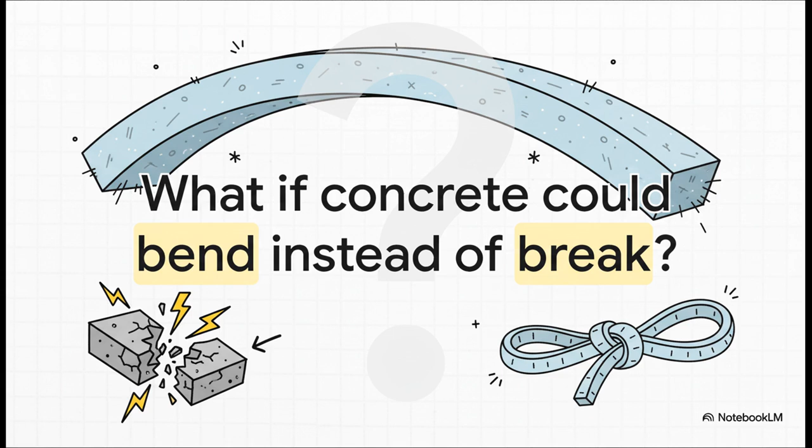I mean, this is the fundamental question. For as long as we've been building with concrete, its Achilles heel has always been its brittleness. Under tension, it cracks, and that crack leads to catastrophic failure. ECC is a material that was designed, right from the micro scale, to solve that exact problem.

And here it is, the punchline, right at the start. Just look at these numbers. This is the tensile strain capacity, basically how much it can stretch before it snaps. Normal concrete gives up at about 0.01% strain. ECC, it can get past 2%.

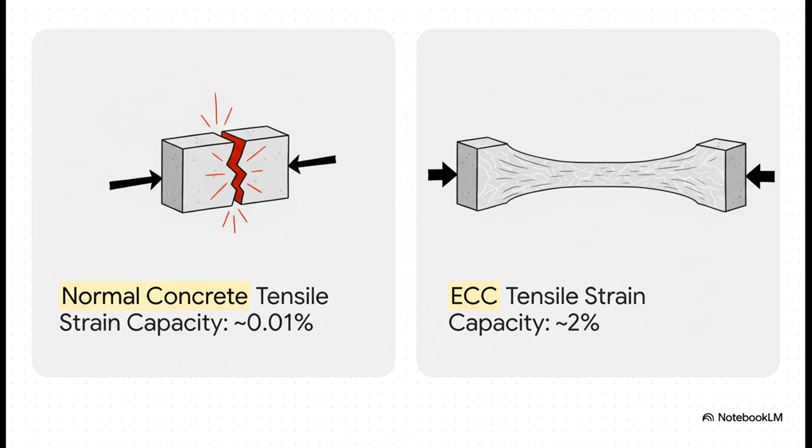And I want to be really clear here, that is not a 10 or 20% improvement. We are talking about a more than 200-fold increase in ductility. This isn't just a better concrete, it's a completely different kind of material.

So what is ECC officially? Well, it's a composite that's been specifically engineered to act more like a ductile metal when you pull on it. And the key term you're going to hear a lot is pseudo-strain hardening. All that means is that, unlike regular concrete, which fails the second it gets its first real crack, ECC actually keeps getting stronger while forming this whole network of tiny, tiny micro cracks.

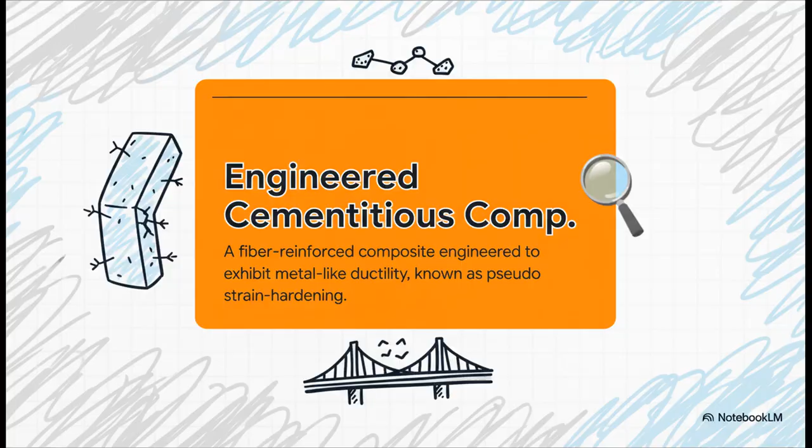Okay, so to really wrap our heads around what makes ECC so special, we have to look at how it behaves under the one condition that is concrete's mortal enemy: direct tension. This is where all the magic, or, the carefully engineered science, really happens.

Now, for any of you who actually work in a materials lab, this is a super important point. The standard tests we use for concrete, like the splitting cylinder or four-point bending, they're all designed for brittle materials. If you use them on ECC, you're going to get results that are not just misleading, but non-conservative. They'll actually overreport the material's strength.

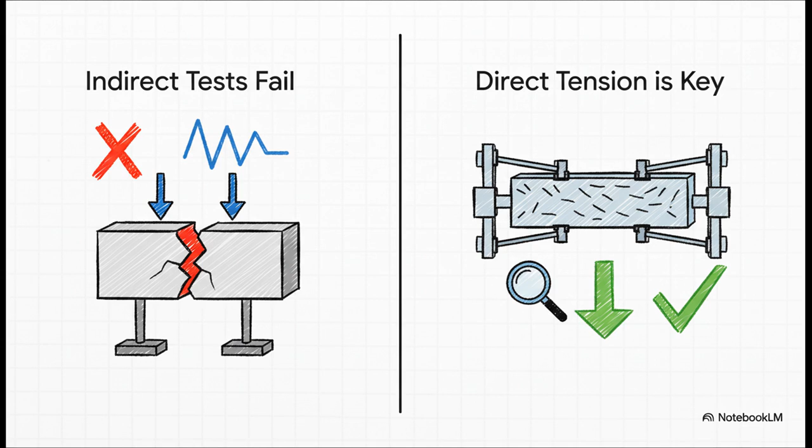The only way to see what this stuff can really do is with a direct tension test. And honestly, the fact that you can even do that test without it shattering is a testament to ECC's built-in damage tolerance. This stress-strain curve tells the whole story.

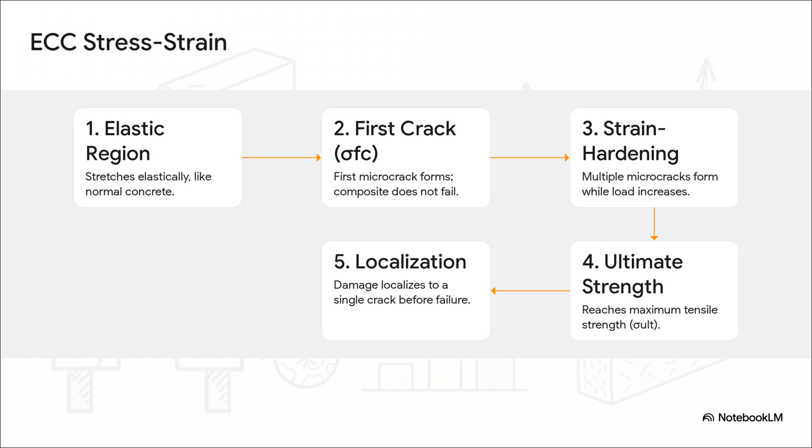At first, it behaves just like concrete, stretching elastically. But then you get to the first crack, and everything changes. Where concrete would just catastrophically fail, ECC enters this incredible strain hardening phase. It forms a whole series of fine microcracks, and, this is the critical part, it keeps taking on more load. It only starts to truly fail after it's hit its absolute maximum strength.

So how in the world does it do that? Well, the secret is all in the micromechanics. The mix is full of these tiny polymer fibers. When a microcrack starts to form in the cement, these fibers act like tiny bridges across the gap. They're designed with just the right amount of grip, strong enough to transfer the load, but also able to slip just a little. This controlled slip prevents any one crack from getting too wide and forces new microcracks to open up somewhere else instead.

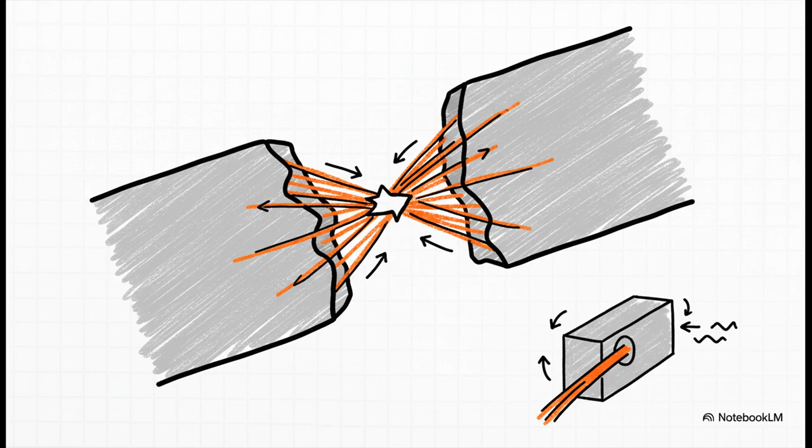And the practical benefit is just stunning. In bending tests, the flexural strength of an ECC beam can be more than 3 times its initial cracking strength. Just think about that for a second. The beam gets significantly stronger after it has already started cracking. For a structure in the real world, that's the difference between a sudden catastrophic collapse and having a built-in warning system.

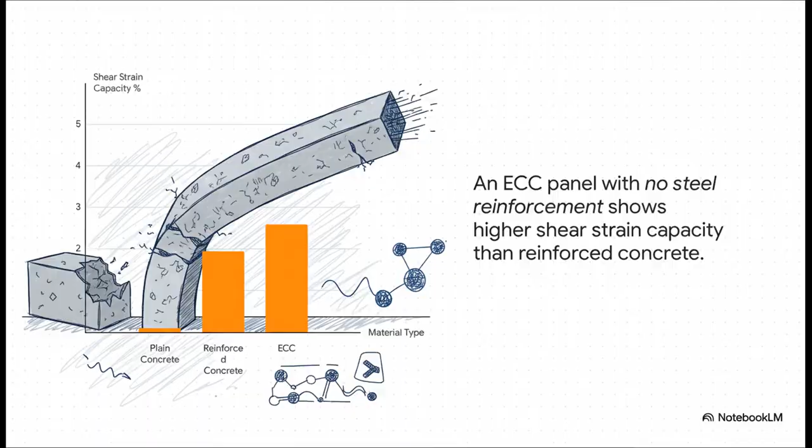And the reason for this amazing shear performance is actually pretty simple when you think about it. Shear failure in brittle stuff like concrete is really just a failure in diagonal tension. So because ECC is so incredibly ductile in tension, it handles shear by just forming a network of tiny diagonal microcracks instead of one big catastrophic fracture. The bottom line is, by solving the brittleness problem in tension, you automatically create a material with phenomenal shear resistance.

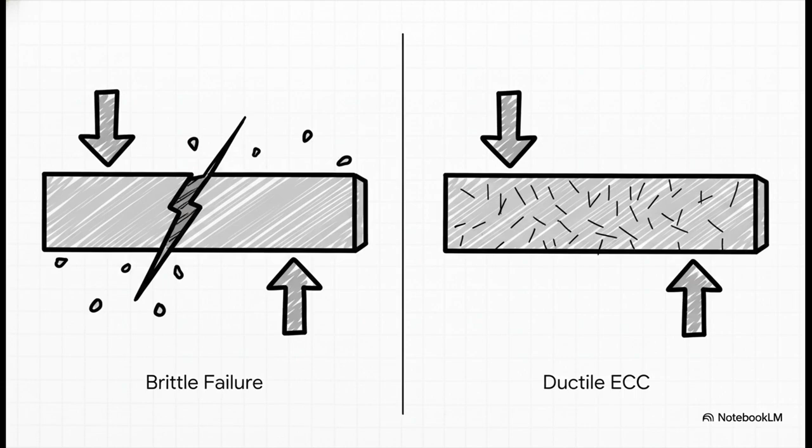Now, it's really important to get this. ECC isn't just one single recipe. It's more like a platform technology. You can think of it as a whole family of composites where you can precisely tune the properties for a huge range of different applications.

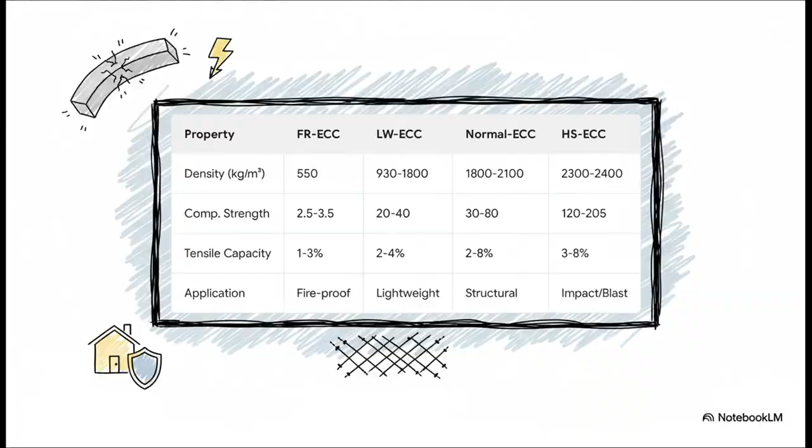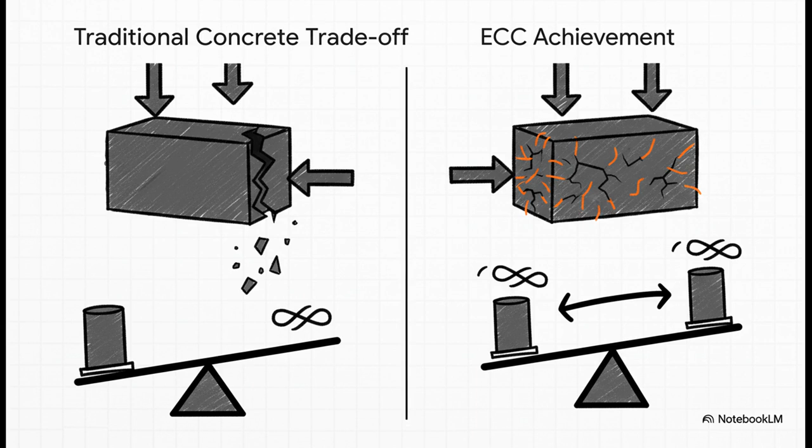And this is really the ultimate engineering achievement here. For decades, with concrete and other cement materials, getting higher compressive strength always meant you had to sacrifice ductility. The stronger it got, the more brittle it became. ECC completely breaks that link. It lets us design materials that have crazy high compressive strength and are also incredibly ductile.

So, let's wrap this all up. For you, the people who will be the next generation of material scientists and structural engineers, what's the big picture here? What's the main thing to take away from all this? It's truly a paradigm shift. For more than 100 years, designing with concrete has been an exercise in managing brittle failure. We add steel rebar to contain the damage we know is coming.

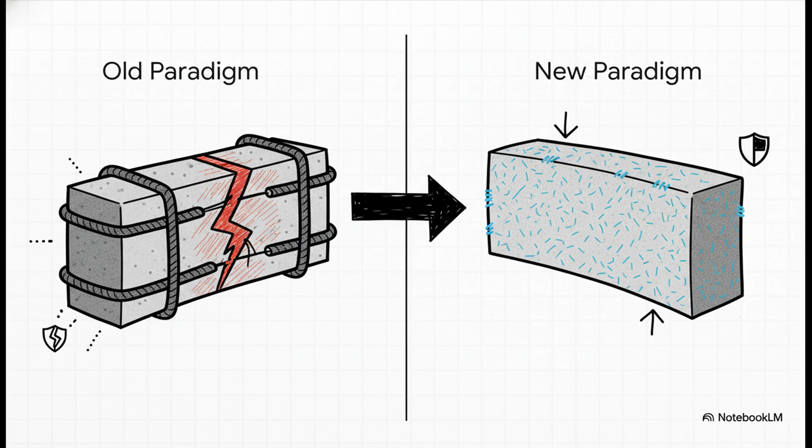ECC lets us move away from that purely defensive strategy. For the first time, we can design structures using a cement-based material that is inherently ductile and resilient, right from the very beginning. And that really leaves us with one last big question. By engineering this incredible ductility into the most common building material on the planet, what does that unlock? What new, more elegant, more resilient structures can we now even dare to imagine and create? That's the challenge, but it's also the opportunity that ECC presents to all of us.